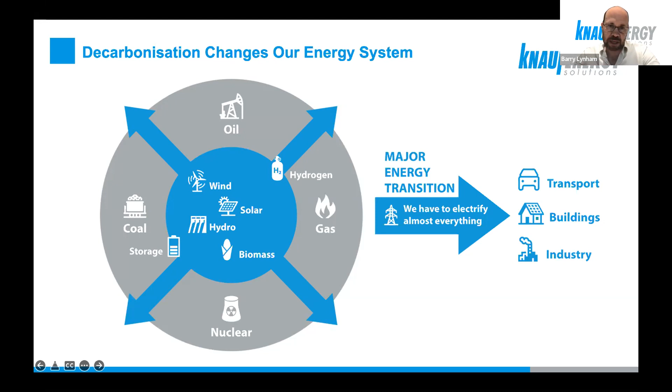And that, of course, has a big issue around the fact that that also leads to a situation where you go from very stable energy sources to much more intermittent sources. But on top of that, of course, you're also having to electrify the industry sector, the transport sector, and of course, interestingly today, the housing sector. And that we see as having some major impacts in terms of how we look at the energy system and how we introduce heat pumps and we actually electrify.

And when we look at the challenges of electrification of heat pumps, we see kind of two major issues which are really important to take into account. And the first kind of major challenge is the daily constraints. Obviously today when we heat homes using gas, it really has very little impact on the grid. Whether we heat in the morning or we heat in the evening, which is typical for a normal heating cycle, even though that's when the grid is under most pressure already in terms of use, it doesn't really make much difference because we're using gas.

As we go to an electrically heated world, obviously we're going to have some major challenges in terms of how we manage that sort of peak in the morning and the peak in the evening, particularly because today houses are quite dumb, right? They're not active houses. We're not easily able to shift energy use from time of day. So that's going to be for us a really big issue: how are you going to manage that shifting of energy use away from peak moments?

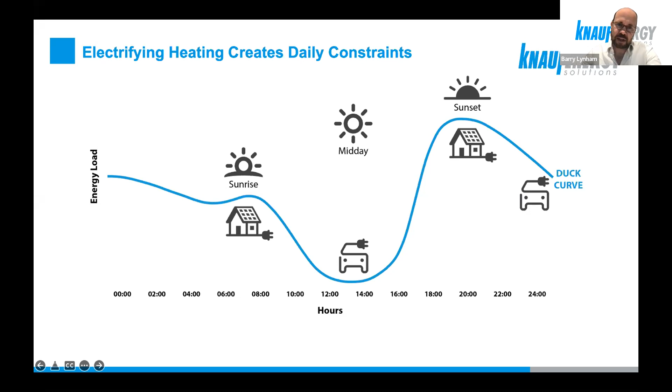But probably the bigger issue that we see and the bigger challenge that we've been looking at, and we've been using our own projects to better understand and to try to get a sense of what we're facing in the future with electrification of the heating system, which we think is absolutely an essential way forward. But we have to really understand that challenge and live up to it.

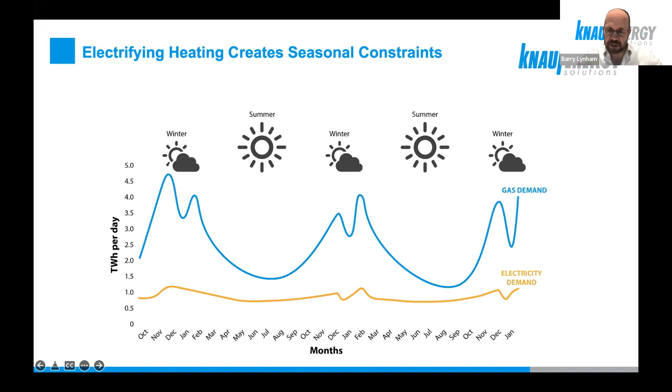And what you see here on the yellow line is typical electricity demand in a Northern European country. And the blue lines are the current gas use. And the big thing that we're seeing here is that today electricity use is quite flat across the year, but gas use, of course, is massively peaking in the winter and dropping down in the summer. And this is creating a big challenge. And we wanted to really use our projects and our real-time data in terms of the actual use of gas and energy to try and understand what that would actually mean for our energy system going forward.

And so we did an analysis both in the UK and Germany. The figures are very, very similar for both countries. But what we see, not unexpectedly, is that as we electrify heating, the electricity generation goes from that yellow line at the bottom, which again is quite flat, to a situation where we're going to have massive peaks for electricity in the winter, relatively very little demand in the summer, and back up to peaking again in the winter at the end of the year. And that really creates a radically different annual demand curve than we currently see for electricity.

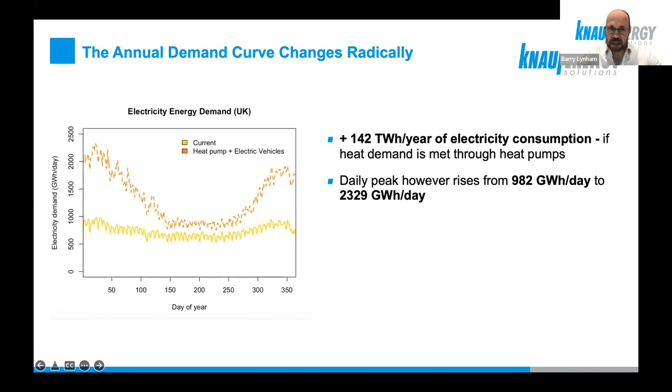And when we look at that challenge against the energy generation capacity, and just to give you a sense of what we did, we made a base presumption that in the future we'd have 1/3 wind, 1/3 solar, and 1/3 nuclear as just a starting point.

We're not making a view of what we think should be the energy demand or the energy production of the future, but trying to get a general perspective on what the energy mix might be in the future in a zero carbon world. And what we see is we start to compare the demand curves, these new winter demand curves and lower summer demands, against the intermittent production of electricity.

Because of course, as we move to wind and solar, particularly in Northern Europe, we're going to see much lower solar generation in the winter, but also periods of very low wind generation where you're going to have very high demand meeting very, very low production. We call it the peak trough challenge: the challenge between the peak demand, which is coming in the winter, and the generation troughs, which will probably happen most years.

And when we look at what that means in terms of the full capacity of the energy system, we start realizing that whilst demand for electricity probably only doubles, the need for generation capacity goes up. In the UK, but also with very similar numbers for Germany, we're looking at almost 5 times more generation capacity that needs to be built to make sure that when we have this peak trough moment, we have enough generation capacity.

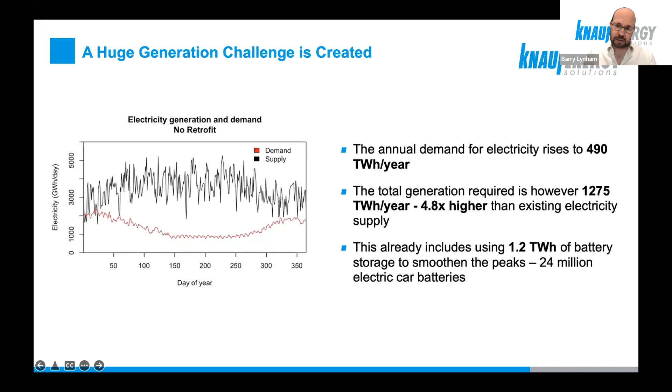The good news, though, and this is why we say energy efficiency isn't just about energy saving anymore, is that as we look at the impact of energy efficiency measures, we can massively reduce that peak generation need. In fact, for every kilowatt we reduce through energy efficiency in the building stock, we see a 4.7 times, or in Germany a 5.2 times, reduction in the need to oversize that grid.

So we're not talking about not doing more renewables. We know that there's an absolute need to massively increase renewable generation capability. What we're saying is that if you're not careful as we electrify the building stock, we're going to have a massive oversizing of grid capacity.

Because we also note that in this peak trough world, you end up in a summer situation with massive overgeneration capacity lying idle because the need for that heat just isn't there. So in the future, energy efficiency isn't really about saving the energy in your home or my home. It really becomes about how we make sure we have a generation capacity environment which makes sense.

And for me, this very fundamentally changes the debate about energy efficiency, because it's no longer about the money that we save as individuals. It's about the reduction in the generation costs of our entire energy system. And therefore, we have to rethink how we see the support mechanisms that go around this challenge.

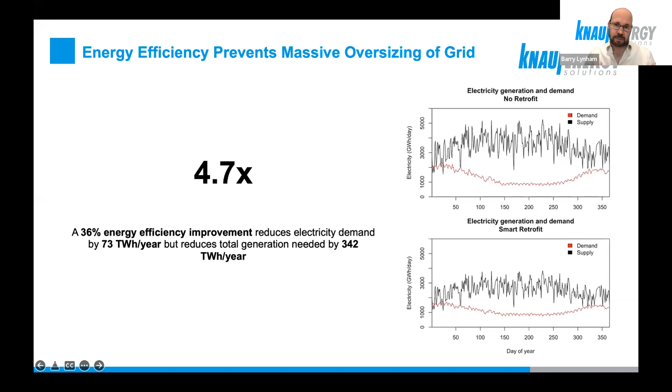And our perspective at Knauf Energy is that when you're talking about reducing generation capacity, the tap in this bathtub image, we're currently presuming in the OECD countries a 1.6 trillion a year investment in the taps and only 211 in energy efficiency. That tells you that energy efficiency first principles in the real world aren't really there. We're far from that principle.

What we're saying is that in the future, we're going to have to transfer more and more of that funding away from the tap towards efficiency, because that's where we'll get the biggest bang for our buck. But no government is going to not build new power generation for fictive energy savings. We have to move to a world where we can guarantee that the energy efficiency capacity we've created, the virtual power plants we're building, are delivering real capacity reductions.

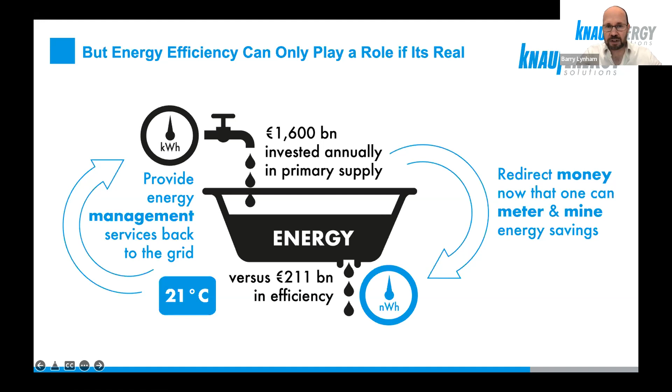And we're going to have to understand the energy efficiency of a house in real time, really understand the thermal performance, to offer management services, to go back to that first slide: how do we solve the daily peaks and the daily demands? That's what we think is absolutely essential.

So a massive, massive under and a massive, massive over assumption, meaning that if we're really going to be right-sizing heat pumps and managing those houses in real time, the current structures we have, unfortunately, are not going to provide the kinds of real-time data you're going to need to manage that house correctly, but also to make sure you right-size those heat pumps and we get the right type of solutions in. So that's kind of where we come in as a company.

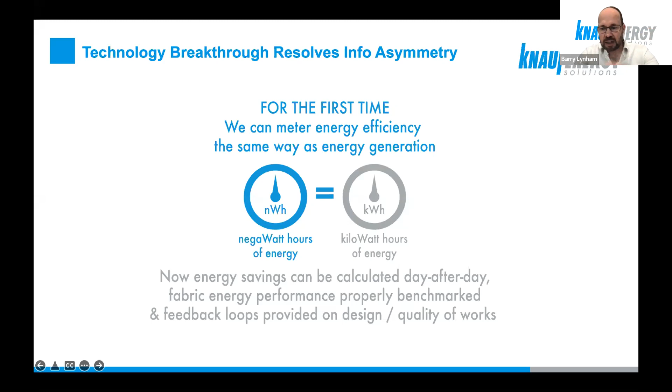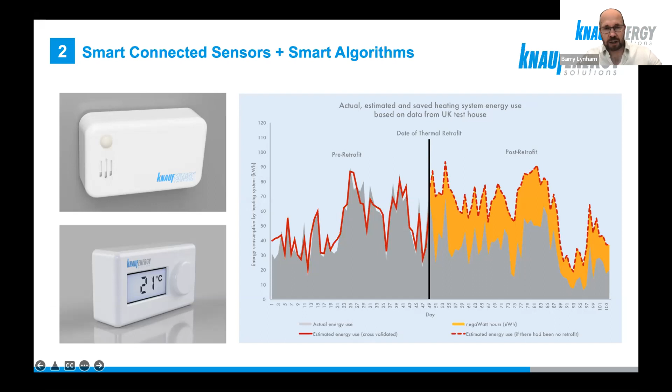And also to establish trust amongst government and amongst homeowners that this is really actually delivering the energy efficiency. But I'm not really here to talk about our technology, but that's what we brought to the market. And I'm happy to talk to anyone afterwards to explain how that works.

But importantly, what it means is that as we start to roll out heat pumps and electrify our systems, as we start to realize that we can't oversize our capacity generation, otherwise we're going to really struggle with this massive decarbonization of our system, we can start completely rethinking the way we support energy efficiency and the rollout of heat pumps. And we can think about pay for performance approaches where, as we can produce negawatts, we can also now pay for that capacity.

And one of the things that we think is absolutely essential for the next phase of the rollout of energy efficiency, but also electrification, is developing capacity payment mechanisms for energy efficiency. What we're seeing as absolutely missing, and we think is a vital policy change, is capacity payments on the energy efficiency side, not just on the production side. And if we can develop those pay for performance approaches, which allow capacity that's demonstrably taken out of the system to be rewarded by the system, we can accelerate energy efficiency.

We can accelerate the heat pumps going into the system, make sure the heat pumps are properly sized for those houses, and make sure that we can actually get to where we're trying to get to as a society, where we get a large amount of renewable power, but also a heating system which matches that renewable in a way that doesn't mean we have to massively oversize.

And just in terms of some of the numbers, when we do energy efficiency, we are a full one-stop shop. We do the retrofits from design through delivery, plus we know the real savings. We know from our first data from projects that energy efficiency costs about 1/3 of what generation capacity does in this kind of model. And so it seems to make a lot of sense to move in this way.

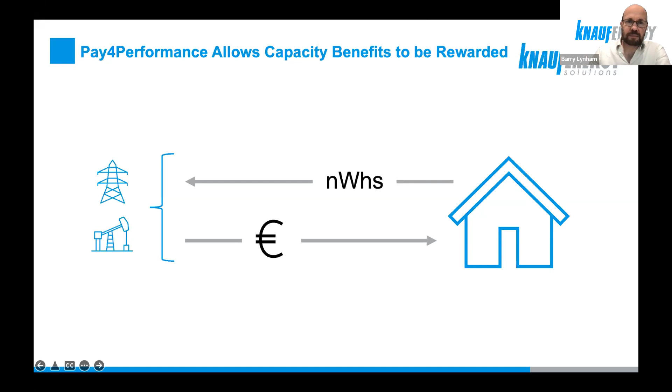Thanks a lot, Barry, for this presentation and interesting overview of your technology as well to help with this and to help make sure that we don't oversize also the electricity grid and make sure heat pumps can be integrated through efficiency solutions, which I guess is very important, especially as the number of heat pumps go up.

Then we have now the next presentation by Claudio Carano, who is the project marketing manager at Clivet, and he will focus on solutions for the Mediterranean area, but also beyond, and in particular solutions that could work for unheated dwellings, but also rural homes.

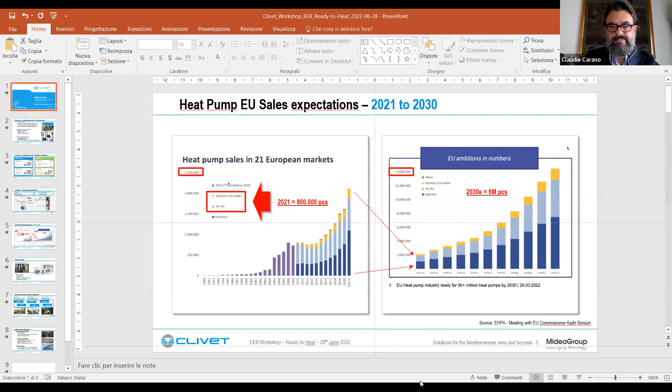So let's share the screen and let's start. Thank you very much. I hope you can see my screen now. So now it should work. Can you just confirm you can see the screen? Thank you very much. Thank you very much for this introduction.

I'm very happy to be with you from Italy, near Venice. And as already mentioned, I would like to share with you some live experience from the Mediterranean areas. And what can I say? The heat pump technology is a really perfect match with this kind of climate and application. First of all, because the heat pump is not only heating, as very often is thought in northern areas, but it's an important resource, especially on cooling.

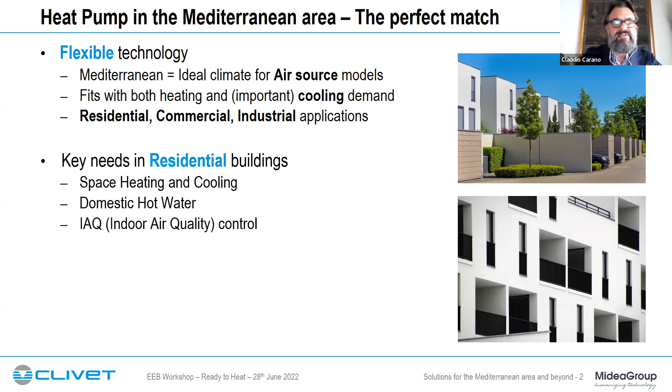So summer cooling is a dominating function in summertime. And this can be useful in residential, commercial, and industrial applications, not only in residential. But let's focus now on residential buildings. This is the topic we are focusing on now. Let's start from the needs: everybody's experience about space heating and cooling, domestic hot water, and more and more the indoor air quality control.

How can heat pumps match with these kinds of needs? They can really fit, providing high primary efficiency. You know, the current European regulation is able now to measure the primary efficiency and compare different technologies for heating, like fuel heating, electric heat pump heating, hybrid heating, and so on. One of the big benefits is having no local CO2 emission and resulting in an optimal TEWI. TEWI is a very technical parameter, a KPI. It means total equivalent warming impact.

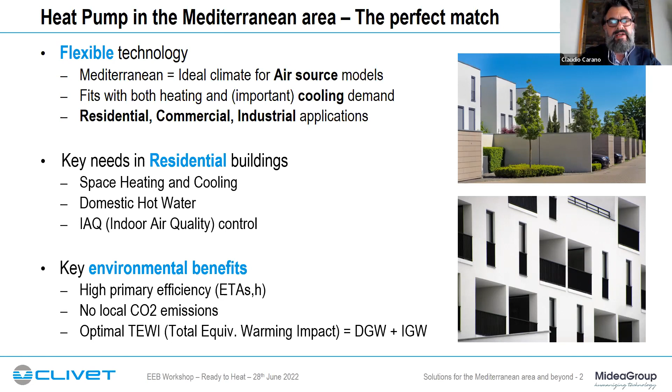And basically this is composed of two factors. One is the direct global warming. This is, for example, related to the refrigerants, the risk of leaking refrigerants. And the other one is the indirect global warming. This second factor, the indirect global warming, is much, much bigger, something like 90% of the total. And this is related to the energy consumption. So it is very strongly connected to the energy efficiency all over the life cycle of the system.

There are different kinds of heat pump technologies and layout solutions, especially in the Mediterranean area on residential application. One of the most popular has water on the load side. It means, for example, as we can see on the upper left part of the screen, having a central heat pump, then water lines providing water, for example, to radiant panels or fan coils. This is a quiet system. This is suitable in renovation as well. Or as we can see on the lower part of the screen, this system can be integrated with a ventilation heat pump as well, central energy assistant.

And as we have seen from the previous speaker, we can also integrate this system with an energy storage system, for example, in order to benefit from the electricity produced all over the day. This system has top efficiency, and it is able to provide indoor air quality in addition to the previous one, and smart control to minimize the energy impact.

Or, and this is very, very popular in southern Europe, so in the Mediterranean area, on the load side the heat pump can provide air as the heating and cooling medium. There are different solutions. For example, sorry, just, okay.

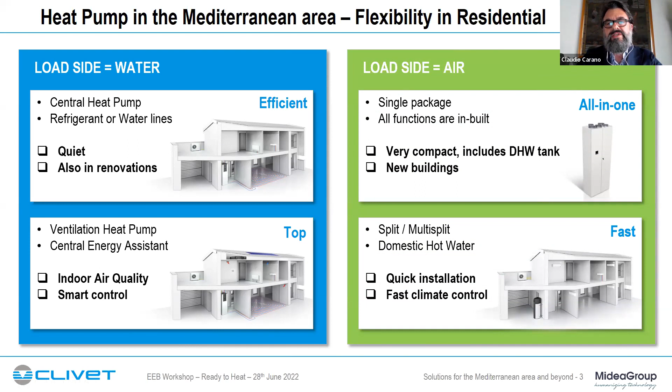For example, there are some units, as we can see top right on the screen. We're talking about a single package having all functions inbuilt, so the ventilation, the cooling capacity, heating capacity, domestic hot water, and they are especially, let's say, suitable for new buildings.

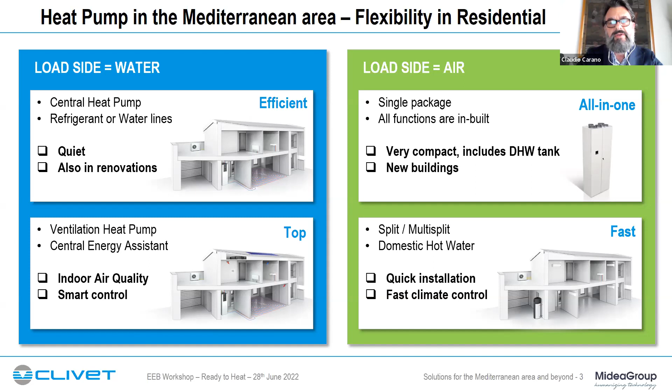While another very popular solution is based on very popular split or multi-split units and an additional specialized unit providing, always with heat pump technologies, domestic hot water. This is very fast as far as the installation is concerned, and this is also able to provide a fast response when switched on. And that's why it is probably one of the most popular all over Southern Europe. We will focus on this system. Let's see together which kind of components this system is based on.

So the main heating and cooling, to cool down or heat up the space, are typically multi-split units. They are air-to-air heat pumps, latest technologies, full inverter, very high seasonal efficiency, and a large variety of indoor units to fit with different indoor designs. And probably the less known, the less popular, but very popular in numbers, to be honest, heat pump is the domestic hot water heat pump.

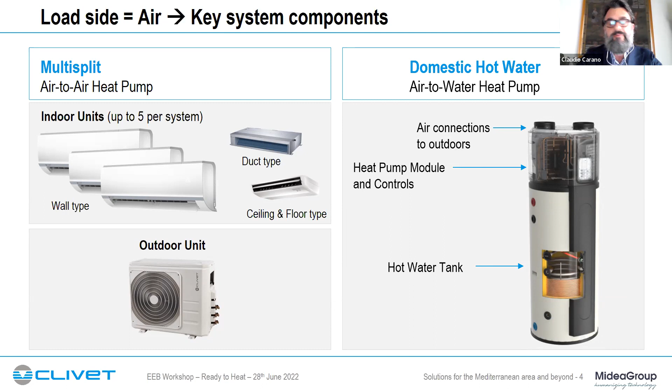It looks like what we can see on the right part of the screen. It is basically a tower where the heat pump is located on the upper side of the unit, together with controls. And the lower part is a big, usually 200 to 300 liters, hot water tank in order to provide fast domestic hot water for shower or bath, for example.

These kinds of solutions are, to be honest, already very popular. The growth in the European market, I'm talking about new heat pumps sold year on year, is really impressive. We can see here the progression from the early 90s up to 21, including all the key European markets. If we focus on the sanitary hot water, so the tower we have seen a few seconds ago, combined with the air-to-air, we're talking about less than 1 million pieces. This is the total market tracked in 21. This number is close to 50% of the total 2 million heat pumps provided in 21 in Europe.

But the most exciting and challenging projection is what will happen in the next 10 years. This is the expectation, the European ambition. These charts are from the EHPA meeting with the European Commissioner, Kadri Simson. And we can see the progression is very, very impressive, leading to something like 12 million pieces in 2030, where more or less half of them are expected to be exactly the system we are talking about for the South Mediterranean area. So split and multi-split units plus sanitary hot water packages.

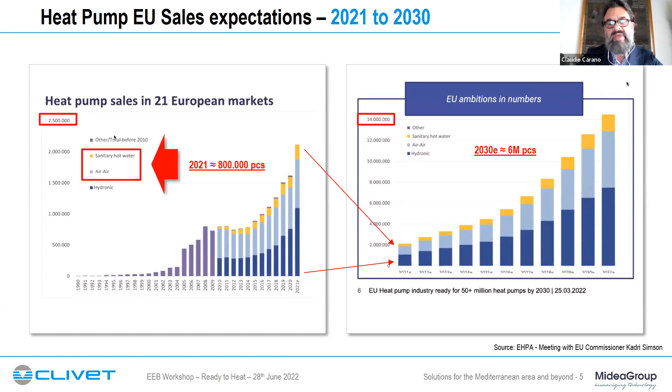Just to share some real experience and to become a little bit more familiar. Probably everybody is very familiar with split and multi-split heat pumps, while the domestic hot water heat pump may be something a little bit unknown or strange, but we will become more and more familiar with it. As far as the size is concerned, it is more or less like a fridge. So it's a vertical tower. From the sound point of view, it is quieter than a split unit and can usually be located in the box, in the laundry, in the kitchen and so on, and can also benefit from solar energy from thermal panels, for example, if and where the house is equipped with this kind of technology.

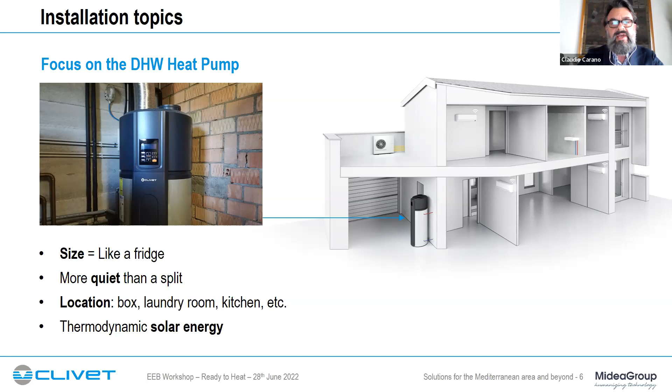It is a very fast system. Usually it is known as a fast system. And a popular application can be rural homes, for example. We should always remember that according to the European Commission figures, over 30% of European people live in rural areas, or vacation homes. Over 500 million nights were spent in vacation homes in 19. So we're talking about really a massive application area, or passive houses and social housing as well. The kind of response for this kind of system is very similar in all these kinds of applications.

This application can be off-gas grid. The solution is scalable, so it allows the users to increase capacity over time, and especially it has a very fast response, so it is able to cool down or heat up in a very short time, just because the heating and cooling effect is immediately transferred to the indoor air. Very important in the southern Mediterranean area, in the southern European area. All these systems are able to provide cooling as well, not only heating, in an efficient way. And this is, I would say, a must nowadays.

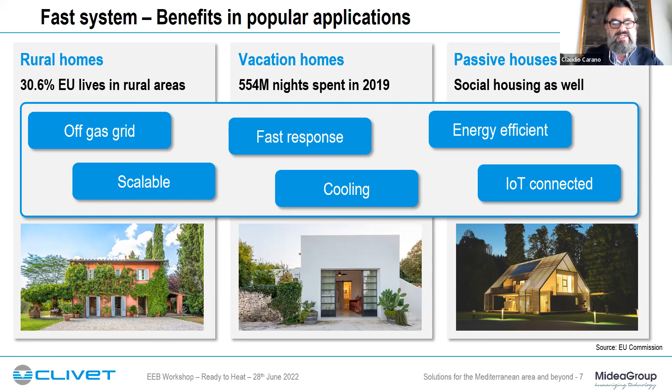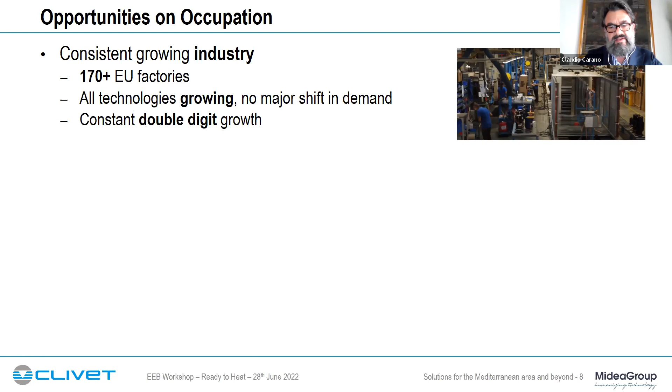To be honest, I'm coming from the industry, and this is an opportunity also from the occupation point of view. Currently, over 170 factories are directly involved in the heat pump evolution all over Europe. All technologies, whether water or air technology, are growing, so there is no major shift in demand, and the magnitude of this growth is double-digit year on year.

I would like just to share our own experience. We are based in Italy, and we are part of a global group based in Asia. And to be honest, we faced a real example of reverse delocation from Asia to Europe, to Italy to be more specific, in 2017, when the domestic hot water technology was moved from Asia to Italy in very few months.

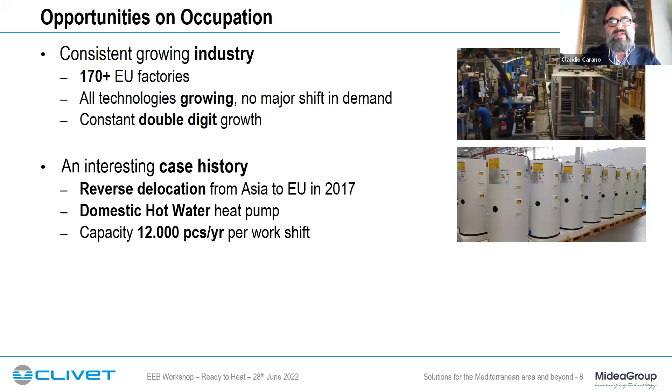At that time, we set up production lines able to produce, in a very short time, 12,000 pieces per year per work shift. So this resulted in a very good opportunity also from the social and community point of view. This is just an example.

We are very involved and committed in the next developments, not only our company, in such a fast-growing market. New sustainable factories are the result of large investments. And this, of course, leads to an amplified occupation jump, not only in production, but in the whole supply chain.

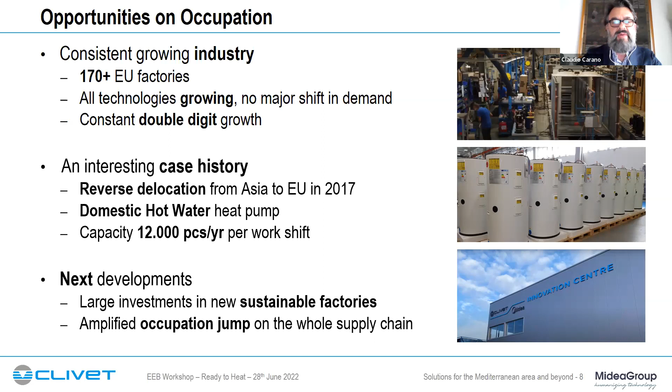Thanks a lot, Claudio, for your presentation. If I may follow up with just a quick question, can you say a bit more about the reasons for relocating from Asia to Italy for the hot water heat pump production?

That's a very good question. Thank you very much. There are several topics. The easiest answer is to be closer to customers. And to be honest, nowadays, despite the cost of labor, the flexibility of having local European production is a key driver. All the transportation issues we have been facing in the last years accelerated this trend very much.

And I would say also the quality of our factories and our workers is well recognized, not only in Europe but also outside Europe, especially in the combination of what we call DX technology, the technology with refrigerants, with the water technology, where Europeans are really among the leaders worldwide. I hope the feedback was complete.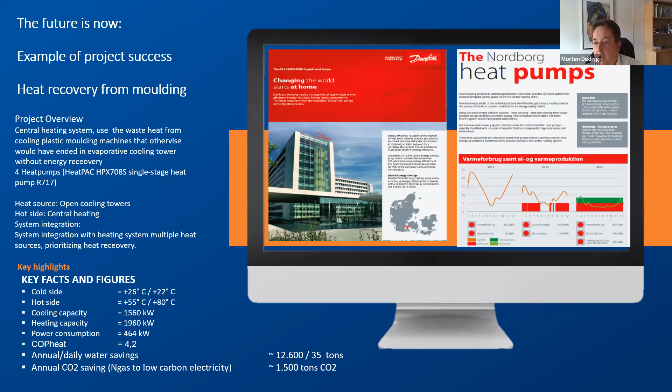It's a complete no-brainer. On top of this, it actually saves the customer 1,500 tons of CO2 and also 35 tons of water daily had they not used the heat pump. So on top of just being a good business case, it actually also adds to the sustainability image by saving water and reducing carbon footprint. But again, here, waste heat is normally just put out in the open. So this was waste heat.

I have another example here. It's heat and cool. You have a facility that demands cooling 13 degrees to 7, and a heating plant 50 to 60. But as we also heard on others of these, it's the balancing. So in this case, a brilliant idea. This is from the Czech Republic.

This is actually a customer who has a cooling plant where he uses cooling in his production. On the other hand, he has a heating plant where he uses natural gas. And then he has a large 1,300 cubic meter reservoir for sprinkling water. In case of fire and there's a malfunction in the water supply, he has a tank ready.

So what we simply do is, during the day, we run the chillers. The waste heat from the chillers is put into the buffer vessel or the sprinkler reservoir. And then, as we demand the heat, we simply empty the buffer vessel. So here, by a fairly simple interaction and combining a vessel we already had for some other use, we actually made a pretty cool system that can balance.

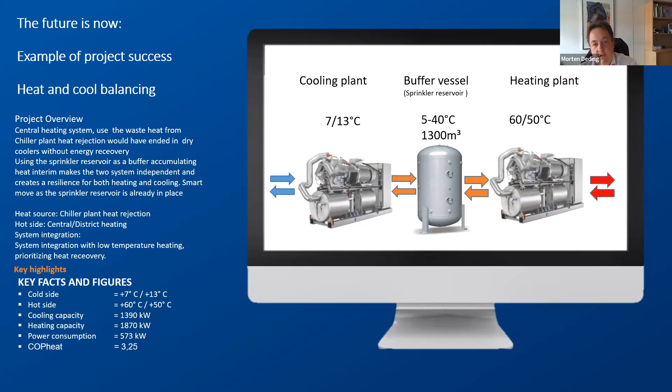And this is an example also of what we see in district heating: utilizing waste heat when it's available, storing it, and reusing it. I have another example, and it's actually showing you exactly the same. This is a data center. This is a large data center.

This is 20 megawatts of cooling capacity, producing 27 megawatts of waste heat. And in this case, the waste heat is removed from the data center, put into a district heating network of a city with over 100,000 people. And this actually provides heat for 7,000 homes, roughly 20,000 people, or 1/5 of who actually lives in the city.

So a data center from Microsoft, Google, Facebook, whatever, placed next to a city with a district heating network, one of these centers, and here is actually more than one center, but just one center is actually 7,000 homes or 20,000 people. So placing large data centers next to urbanized areas is something we will see in the future. This was short-term use of waste heat.

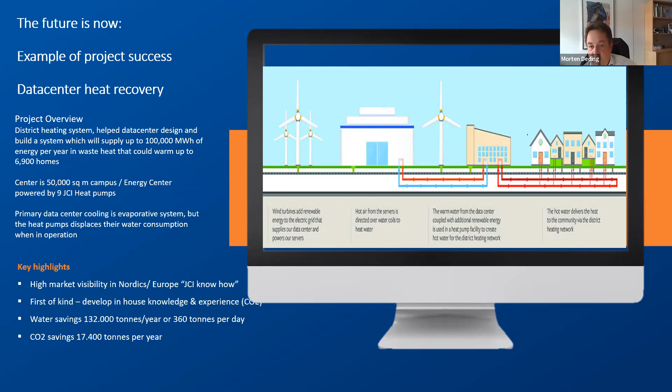I also have a system here with a long-term use of waste heat. In the bottom right of the Mac computer here, you can see an illustration or a picture. This is in fact a solar thermal park. On the left picture, you can see an energy uptake system. So this is just a 6 megawatt air to water system, but next to the ambient air exchangers is a pit, a 60,000 cubic meter water storage.

So during the summer, when it's hot and you don't have a demand for heating in the city, you simply heat up this old gravel pit, 60,000 cubic meters of water. And then during the winter, you can actually take up this water and you can fire up the heat pump.

You can also have situations where it's actually more applicable to use the ambient air as a source, and then you can save the water for a really cold day. But this actually means in this case that the city here provides roughly 40% from the solar thermal directly, and 57% of the heat in this city either comes from air to water or water to water stored during the summer, used during the winter.

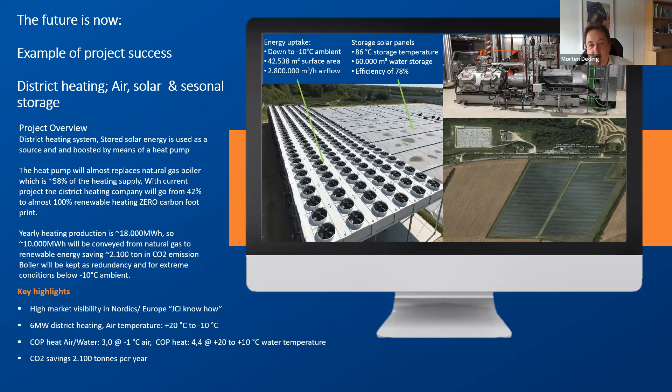Yeah, if I can, I have one more. The European Heat Pump Association issues every year a small contest where you can win an award. And last year, Johnson Controls entered one of our dear customers. It's not the company who wins, it's actually the customer. You can go and see it on the homepage of EHPA if you want, but it's actually an office building, and the office surface is covered in 3,000 square meters of solar panel, PV, photovoltaic.

The whole building is solid. It's made with a lot of concrete. So during the night, on the hot days, we use the seawater to cool the structure of the building, minimizing the cooling needs during the day. Also during the winter, we heat up the building and then store energy during the night. So a very stable system, running very low temperature. And in the basement is a single heat pump

from Johnson Controls. This building's photovoltaic system actually produces 500,000 kilowatt hours per year. Half of that is used inside the building for computers and lighting and coffee machines and whatever. And the rest is used for heating purposes, apart from 5%; this building actually contributes 5% of the energy to the grid. So it's actually a net positive energy building. And it's located in Trondheim in Norway, far in the northern hemisphere. So if you can do that in Norway, you can do that everywhere.

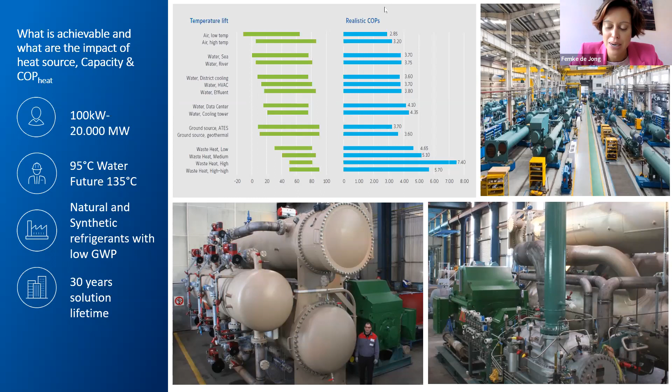Thanks a lot, Morten, for this presentation. You can maybe stop sharing if you like. It's very interesting to also see the large-scale applications for heat pumps and how they can be combined with other sectors. I would just like to go back to Claudio, because in the meantime, there has been a question in the chat, first of all, around the use of F-gases in heat pumps. F-gases are very polluting greenhouse gases that are used as refrigerants. And second of all, as Islene is from Portugal, she had a question about apartments where there can be difficulties for having heat pumps due to a lack of space or split incentives, for example. Claudio, the floor is yours.

Sure, thanks a lot. Both questions are really good questions, and also tough questions, I would say. From the refrigerant point of view, the migration from very polluting, technically very high GWP, global warming potential, which is how the pollution can be measured, to mid and low GWP refrigerants is really in progress. Most of the equipment, most of the technologies have already turned from high GWP to mid GWP, and I guess everybody knows about the new F-gas regulation draft.

So do you see this slide? Did it shift? Yes, it did. Yes. Okay, good, thanks. So for now, it's about, come on,

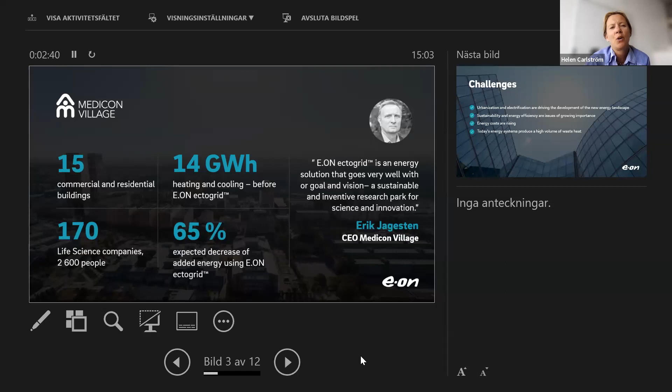Such a technical hassle. So we have about 15 commercial and residential buildings connecting, and this area,

This is not working. So you can click on pause. There's a pause button on the top of the slide, maybe.

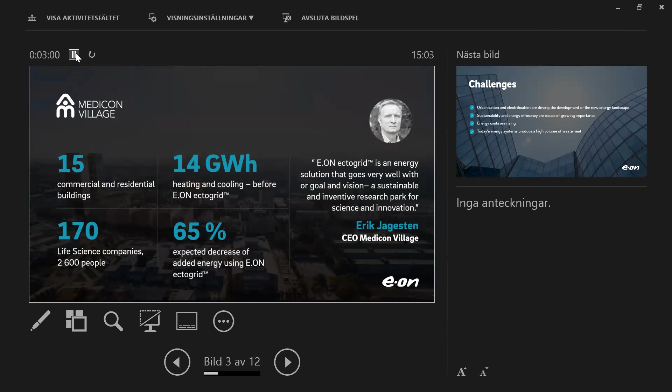Okay, is it paused now? It is. Okay. But now on the other hand, on the wrong slide.

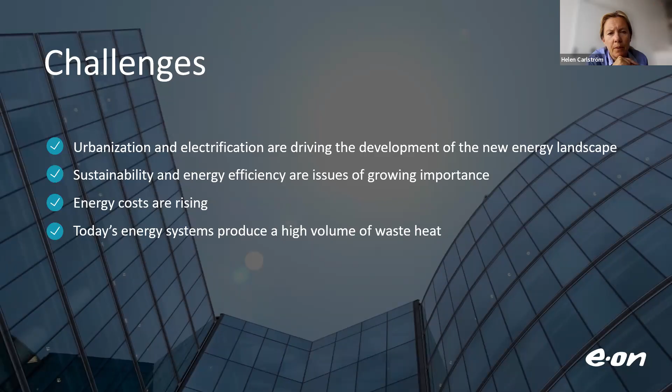So today we are quite good at recovering the waste heat that has a higher temperature. And that is in areas especially where we have district heating. So like in Sweden, Denmark, Germany, some parts of Europe, we have large district heating grids. Then we recover high temperature waste heat. But all the other waste heat with the lower temperature, we cannot recover with the technology we have today. And this is what we're doing in this system.

So when walking through a city, you do notice that there's a lot of heat being expelled to the air. At the same time, we fuel and heat our buildings with gas. And this at the same time. If you take the next one. So what we're doing, this is a very fancy way of explaining what we're solving. Of course, it's not that straightforward.

But what we're really trying to do is combine these different thermal needs before adding new energy to the system or removing energy from the system. And it's an electric system mainly, but it can be balanced with other means. We try to both minimize the CO2 emissions and be flexible in accordance with the actual electricity consumption. But we very much try to remove combustion. We do not think that's going to work in the long run. We take the next one.

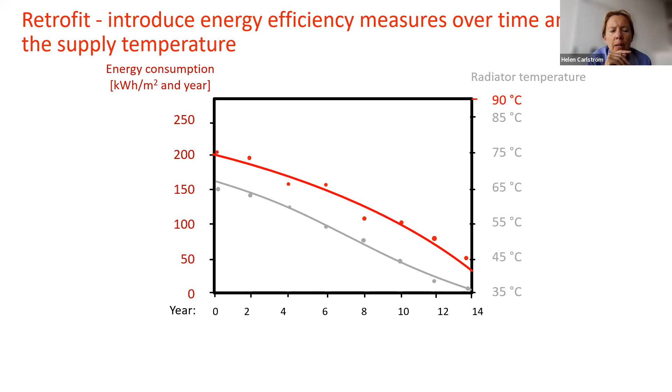And I think it's quite clear, that's a waste. That's a centralized system. It will be waste because most of the customers will not demand that kind of temperature. So if you take the next one. And this is what the development of district heating, and also looking into the future, district cooling systems is about. It's about lowering temperature, because lowering temperature also means reducing the losses.

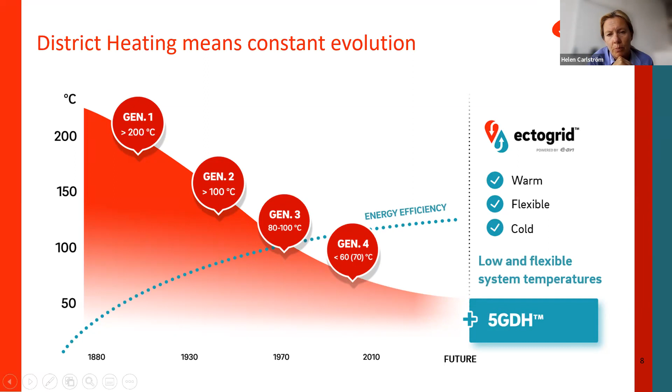And also when building new systems, you can build a district heating system and a district cooling system in parallel. That means you have to put 4 pipes in the ground. That costs a lot of money, and it also consumes a lot of space. So if you take the next one, this is what we call the 5th generation. And now I will try to explain how this works.

We do put heat pumps and cooling machines in the buildings. And as earlier said, a heat pump is the same thing as a cooling machine, pretty much, but installed in another way. So what we do is that we put a machine that is acting as both a heat pump and a cooling machine in the building.

And if the building is in need of heating, it takes from the warm line. The warm line might be between 10 and 35 degrees, depending on what's available. This temperature is boosted to the temperature that specific building needs. At the same time, cooled water, the water that is colder on the other side of the heat pump, is going back to the cold line. That cold line might be, depending on the time of the year, we can control and steer that output, maybe between 5 and 15 degrees, let's say.

That cold water is going back to a customer that needs cooling. So their cooling machine will work very efficiently, and they will be putting back their excess heat, because cooling something is really removing energy. That energy is going back to the warm line. If the customer has both need of heating and cooling, for instance, both cooling and producing domestic hot water the same day, they will balance this within the building, and the excess will be put back into the grid.

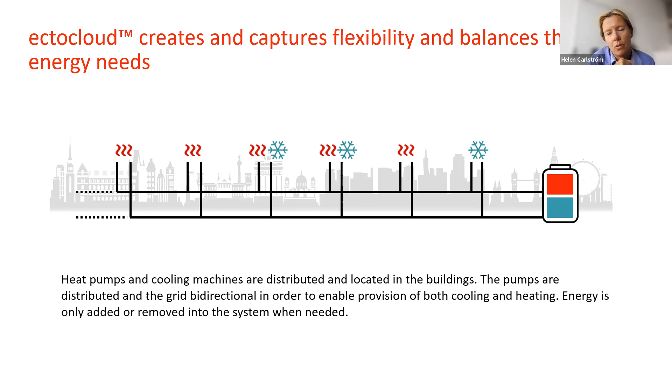You take the next one.

So this is a system that we do not operate with a traditional control room as we normally do in E.ON with energy plants and so on. This is more an automated system. Of course, there are alarm functions and so on, but this is a system that teaches itself a little bit how to operate. Being used to combustion, there's nothing dangerous in the system. It's not boiling water, no fires, nothing.

So it's a system that is possible to operate in this kind of manner. We have it, of course, connected and online and supervise these systems, but it's another way to operate district systems compared to a traditional system with a gas CHP, for instance.

We use standard components. For instance, we could have used Johnson Controls heat pumps here. We do not produce any of these heat pumps or anything. We want to use traditional water piping, not complex steel piping as we normally do. We want to be able to put this into the ground together with, for instance, the local water companies. And we really would like to emphasize this is infrastructure that new customers could connect to, because it's a modular system and scalable over time.

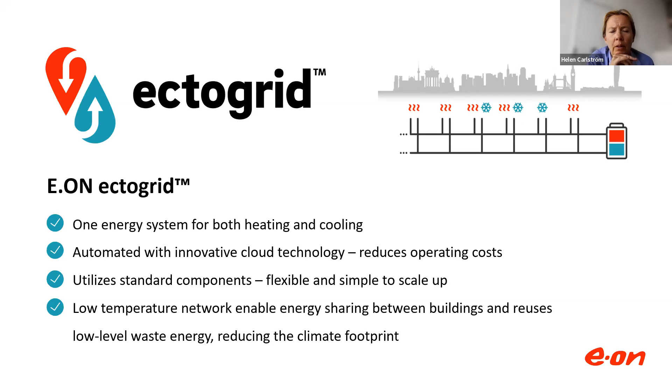So these again are the main components. Here, to make it more clear, we've been putting it as a heat pump and a cooling machine in the building, but it's really the same machine. So instead of heat exchangers in the buildings, there are active components with proper substations containing heat pumps that are connected to the system that we call Ectocloud, which is the control system. We need something to keep the pressure and have a zero point in the system.

We have a balancing tank, mainly a normal water tank, and then we need to balance this system. But if, for instance, a customer does have excess energy, for instance in an office on a warm day like today, that excess energy is going into this tank, and at night when the residential customers come home and they want to do their dishes and take a shower, they empty this tank of energy. And the overall efficiency of such a system will of course be very high.

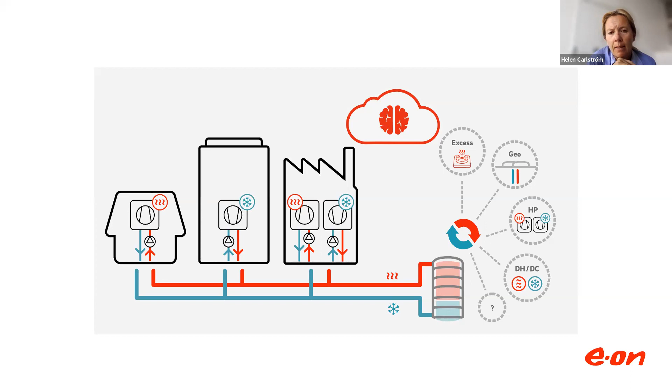We can take the next one. So to manage this, we connect all these assets, and we control it with regard to the energy market and also the weather forecasts. So sorry for the messy presentation in the beginning, and happy to answer questions on this if any.

Thanks a lot for your presentation, Helen. And I think that sort of outlines also the importance of a district approach to renovation, which I think is also an integral part of the report by Ciarán Cuffe on the EPBD, the Energy Performance of Buildings Directive.

Okay, then we move to the last presentation of today before having some time left for questions and answers, which will be by Ferdinando Pozzani, who is the co-founder and CEO of Tion. And this presentation will be focused on centralized heating for blocks of flats with high temperature heat pumps, for example. Ferdinando, go ahead. Thank you.

I hope you can see my screen. Yes. Fine.

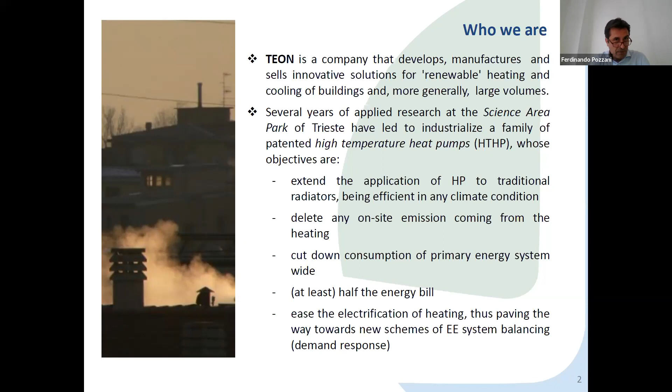Let's have a look at the development of heating, at least in Italy. In 2020, as you can see, while in the production of electricity almost 40% of the production is now coming from renewable sources, in the mobility system a similar revolution has at least started, although it is a little bit lagging. When we look at the production of heating, the contribution of renewable energy has been quite low in Italy. And if we look at what type of renewable sources are used, we can easily understand that the vast majority is renewable by regulation, but heavily polluting.

If we look at how the building heritage is made in Italy, almost 9 buildings out of 10 are heated with natural gas. A small portion with GPL, LPG. Some of them are still heated with gas oil, even in cities like Milan. If we look at the age of our buildings, 50% were built almost 50 years ago or before. 1 out of 5 is considered to be in a poor or mediocre state of conservation, and only a few are in a very high energy class.

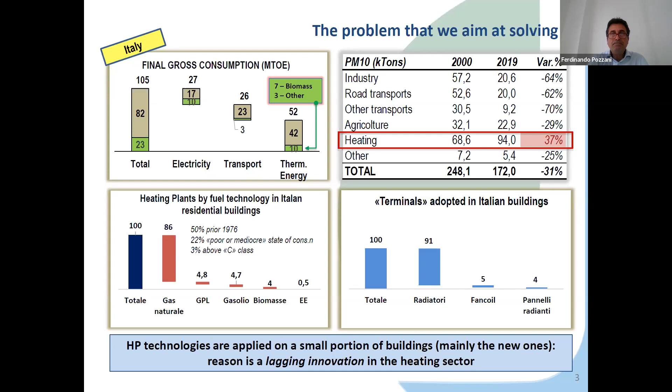What type of characteristic did you want to put in our products? First of all, as I said, we want our products to be applied and applicable in buildings where traditional systems are there and they might not be replaced. So they have to work with cast iron radiators, typically put under small windows with a very limited exchange surface.

We have selected for our heat pumps natural refrigerant. We didn't come to the heat pump producing heating coming from a chiller. We have selected several, about 125 at the time, different refrigerants, checking out which were the most efficient in producing heat, not simply looking at GWP, but also at condensation enthalpy at high temperature, critical point, etc.

Temperature in the heat pump industry: when we talk about high temperature, there is quite an extended degree of discretionality. What is a high temperature? For us, a high temperature is 80 degrees. It's not 55 degrees or 60 degrees or less.

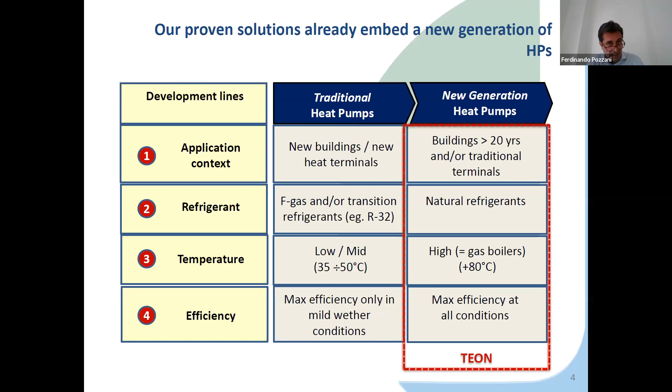Here I show a simple, not particularly big application we did in a condominium that was built in the 70s. It is a condominium where we replaced a gas boiler with a heat pump working at high temperature. So the condominium has cast iron radiators. And in the last thermal season, we are now looking here at the thermal energy that we provided, and the COP and the seasonal performance factor.

This is a water-to-water heat pump. We have a first layer of groundwater at 12 degrees, and we return the water at 9 degrees, and we provide temperature to the system at 70, on average 72 degrees. Of course, we have a climatic curve that fluctuates depending upon the external temperature.

As we see, it is difficult to assess what have been the economic savings made by the building, particularly in a period where gas prices and electricity prices have been changing so radically. We started from a period where the euro per standard cubic meter was 85 cents, and a kilowatt hour cost, the full cost, 23 cents, to a period nowadays where natural gas to residential business is 1.76 euro per cubic meter, and the kilowatt hour has become 0.45 euro.

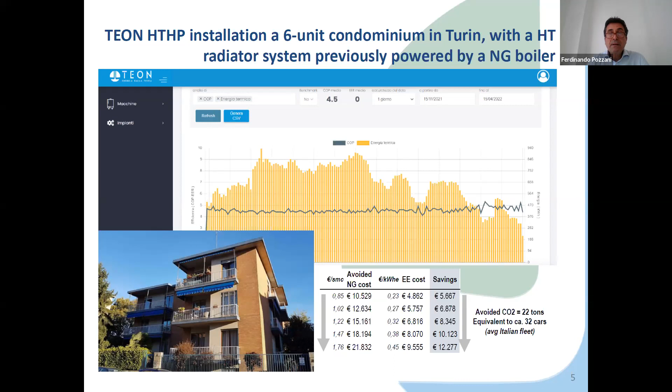Where are our applications? Our applications tend to be in several segments, also in industrial context, in commercial context, in offices, and in the residential business. As I said, we have privileged addressing centralized systems, from 115 kilowatt upside, but we also have developed some products for independent units of smaller size. And this is a little bit about it.

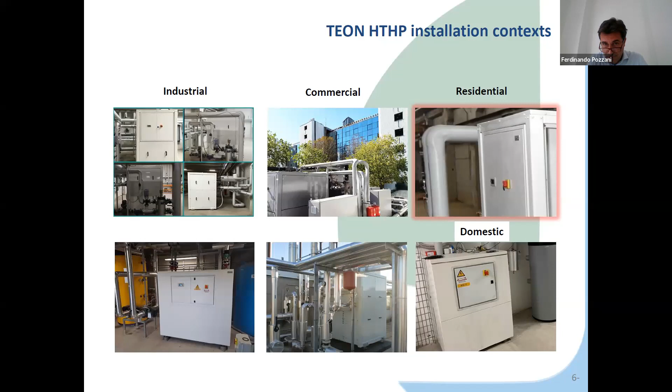And I already saw that we have some questions, from Lorenzo. He is asking why did you choose to use geothermal sources, and why you chose natural refrigerants for the heat pumps?

Geothermal source. Geothermy for us is linked very strictly with our technology. The philosophy of using a heat pump for us is that it has to work efficiently when the heat is more needed. So for us, there is not the point of having a heat pump that when it goes around zero or below zero, the COP tends to follow, say, the Ohm law by using resistances or so.

This is why, although we also have air to water heat pumps, when it comes to deploying heat pumps in climates that are colder, we can rely upon a natural source whose gradient is almost constant all year long.

So regardless of the temperature outside, water in the first layer of groundwater is generally constant if we use an open loop, at least in Italy from 12 to 15, 16 degrees in Milano, or closed loop systems when we use geothermal probes.